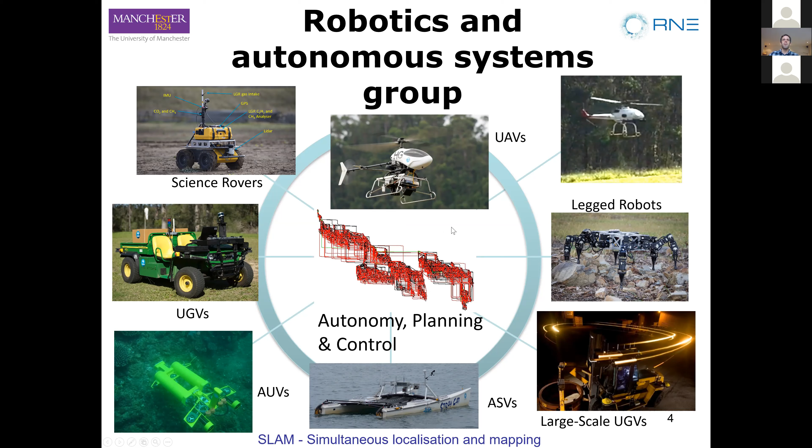Okay, so the Robotics and Autonomous Systems group at CSIRO, they're currently working on the DARPA Subterranean Challenge, and they've completed 3 rounds and they have about another 3 to go. So if you don't know a lot about the DARPA challenges, it's actually quite interesting to look it up. DARPA is the American Defense Research Agency, and they essentially can't be bothered to do their own research anymore. So they put out these challenges and let other people do their research for them. So CSIRO are doing this work on subterranean vehicles for them.

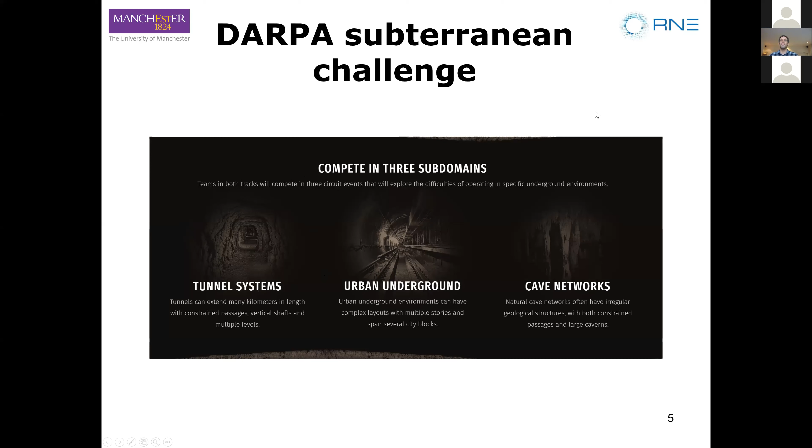Okay, so next I'm going to try this video. So this video is about the team I was working with while I was in CSIRO and the technologies that they're bringing to this challenge. And so Nick, the guy who's presenting this video, he's the leader of the DARPA team at CSIRO.

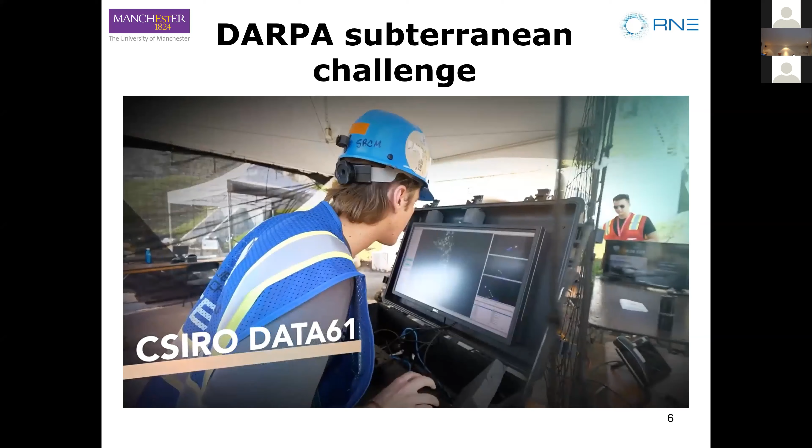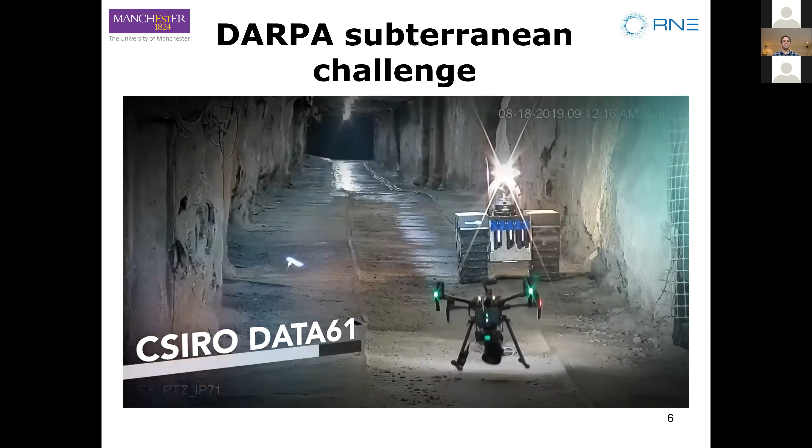We are now creating a big global map and using that for global navigation. And on top of that, we're computing 3D frontiers. So any places in that map where we don't have information, or we think there might be an opening, the robot will be attracted to it and explore these frontiers on the scale.

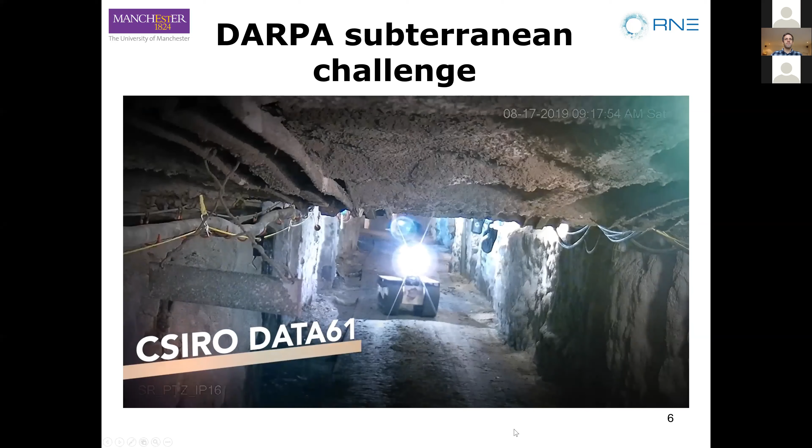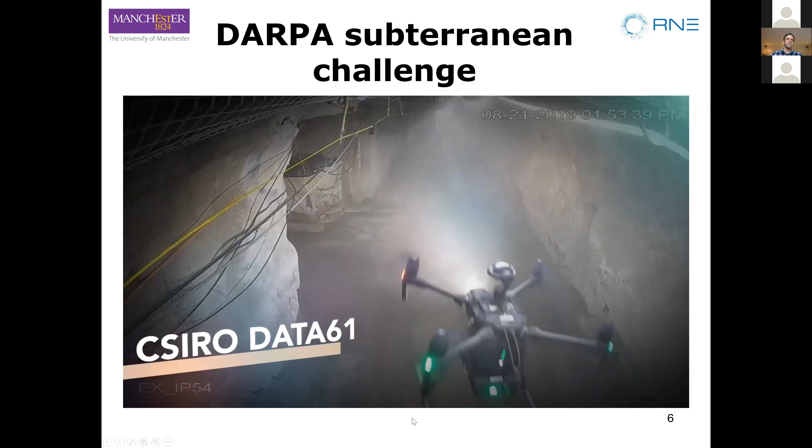We started from a really strong multi-agent localization framework with a spinning LiDAR. So we built a common perception backpack, and then around that, we really built this multi-agent exploration. So the drone's able to explore by itself, the robots with these global maps, and frontier points and constantly explore.

Okay, I'm going to cut that off there, but I hope that gives you a bit more of an insight into what goes on at that lab. So that team that was developing all that stuff is about 30 people. They had at least 10 dedicated people just writing software, and then another 10 engineers doing all mechatronic work, and then they have managers and research teams. So as you can tell, it's quite a big and well organised effort, and some of the robot systems they've got are quite impressive.

Okay, so now I'm going to move on to talking about the work that I did while I was over there in the lab. So the aim of this work was to develop the first mobile robot that can autonomously map a radiation environment and at the same time avoid areas it finds to have high radiation. So functionally, what we wanted out of this robot, we wanted to be able to put it into an unknown radiation environment. So that's an environment that's unknown in terms of where radiation sources might be, and unknown in terms of the physical environment that the robot's operating in.

So a good example of this would be a disaster environment where you want the robot to go in and autonomously explore this 3D environment and produce you both a geographical and a radiation map of that area whilst minimizing the dose that the robot receives.

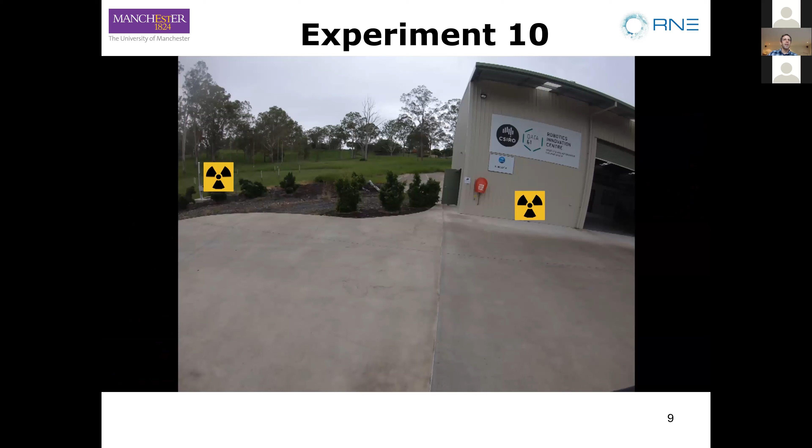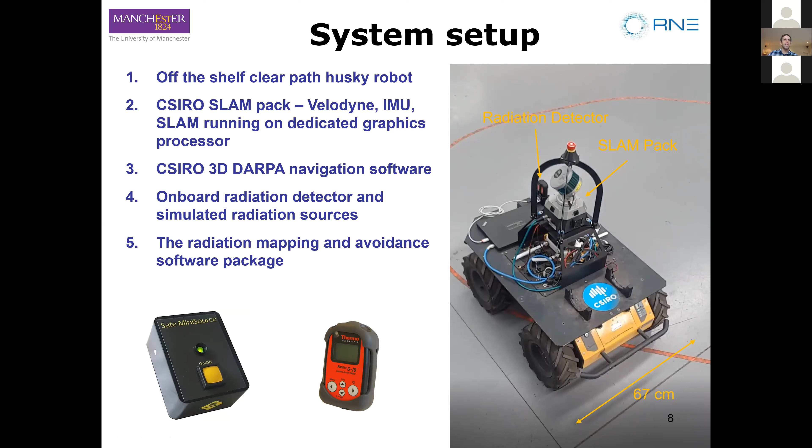What are the next steps for this project? Well, we actually have people in Manchester, so Andy is working on some similar stuff to this, so I think he will probably be picking this up and carrying on with it. But we also have people on our grant that runs alongside RAIN, working on very similar stuff. So there's quite a few people in different areas working on this sort of thing. Which sensor did you use for the methane detection on the robot in the overview slide? We didn't have any methane detection on the robot.

Can SLAM algorithms be used outside of robotics, such as on a radiological operator? Yes, I should have mentioned that; they actually have just a backpack that you can use as well, and they have another handheld version of it too. I'll just do a couple more. Is the robot autonomous or manually controlled, or both? It's autonomous in between waypoints. So I tell it go to this point, and then it autonomously navigates its way to that point, doing all of the obstacle and radiation avoidance.

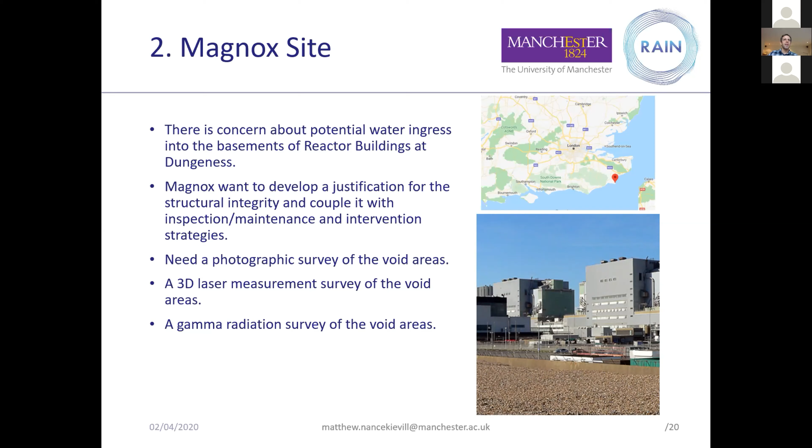So one site that we're working towards, and we were hoping to do a bit of in the next couple of months but is on hold for obvious reasons, is some work at the Magnox site in Dungeness down in Kent. There's a little bit of concern about potential water ingress into some of the basements of the reactor buildings, so we need to justify the structural integrity and couple it with general inspection and maintenance strategies. The big things needed are a photographic survey of the void areas, a 3D laser measurement survey, and a gamma radiation survey. That's relatively consistent across multiple sites. But I'm mainly going to talk about Dounreay today.

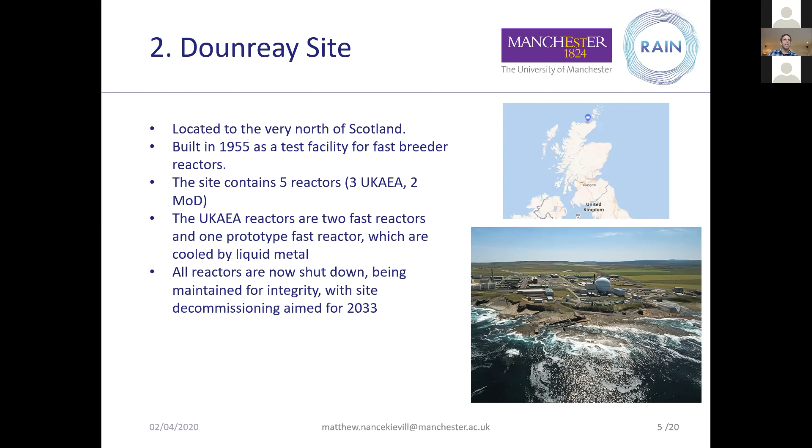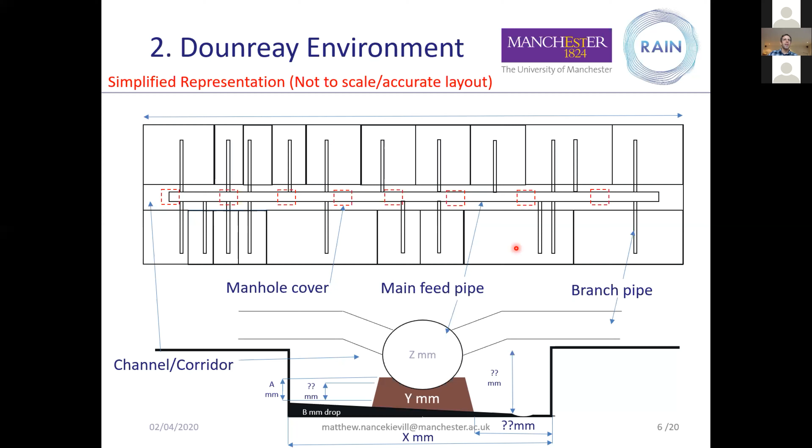So we're looking at operating a robot in this area in the corner here, and we're constrained with size and also deployment mechanisms. We need to deploy down one of these manhole covers, which are a certain size, set up containment, and operate in here. What Dounreay have asked us to look at is a visual inspection of the area: are there any blockages, debris, leaks, that sort of thing, whilst also doing a complete radiological survey. We're talking gamma, neutron, alpha, and beta, but mainly dose rate information. We're not really looking at spectroscopy right now.

Dounreay have agreed to provide all the relevant sensors for the robot. One of the really interesting things is also taking samples or swabs of areas highlighted as areas of interest by Dounreay personnel. Initially this may be 30 to 50 samples, but during our visit it may come down to less than 20; we'll see how it goes. We'll be given about a week to complete the tasks. The data has to be left on site. They're going to be handing us a hard drive that everything has to operate off of. We just get a human readable format out of all the data.

All operations are under remote control, no autonomy, and we need to have a fail safe. So if a wireless link is broken, because at the moment this is all wireless and on batteries, we need some way of retrieving the robot. Hopefully, once this is all complete, we can have some sanitized data to publicize a few weeks after deployment.

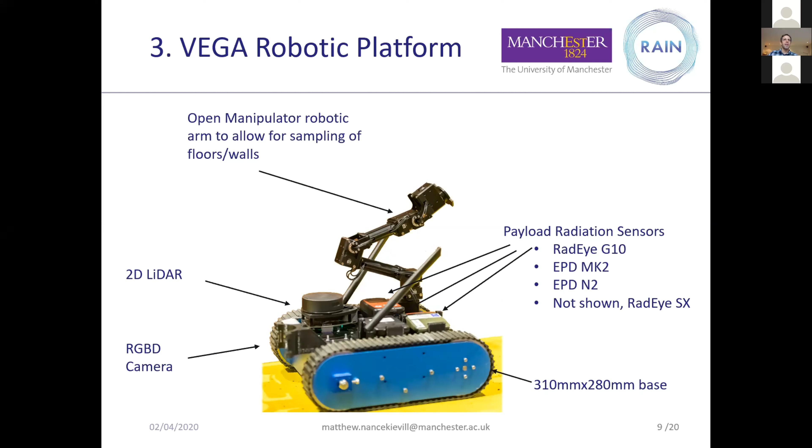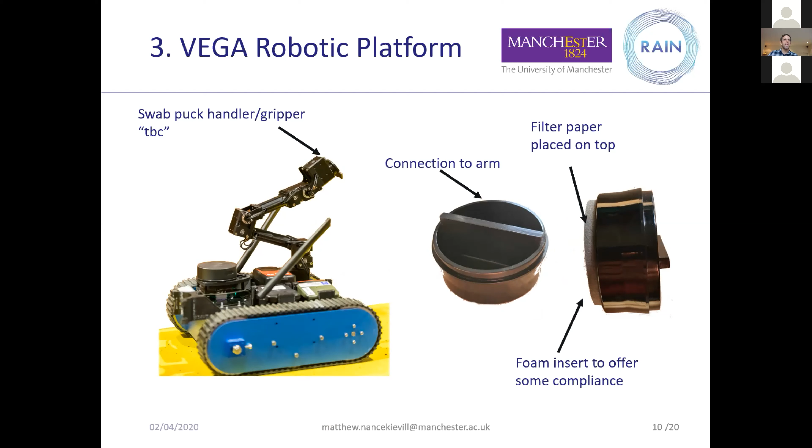We initially wanted to hold multiple bits of filter paper samples on the robot, so we could do multiple samples at one time. This looks quite difficult, especially with cross-contamination, and you can see on the top of the robot it's getting quite packed. So we're likely to pick up a swab, take it back to an entry point, get it changed by an operator, take it back out and do one swab at a time. But this is under constant review.

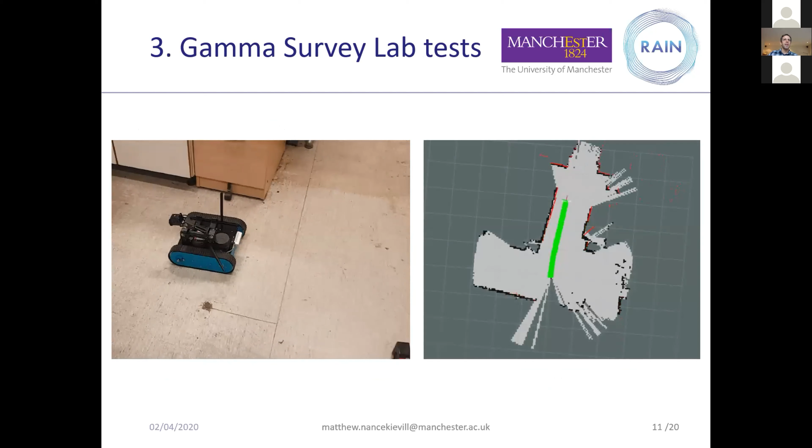So some lab tests of this. It's just a very simple set of videos of the robot moving about. The green on the right represents no radiation, and I'm using the same fake radiation source that Keir was talking about in the previous presentation. So as it gets near, things start going red because you're really, really close to radiation, and then it starts

moving away. But one of the interesting things to take away from this is the sensor only starts showing you that it's detected radiation when it's really close to the source. Now, as it's driving away, you'll see that it's saying there's radiation where there wasn't on the way up. And that's because there's about a 10-second integration time. So one of the ways around this is just driving really, really slowly. Otherwise, we need to do some sort of post-processing interpolation to work out that if it started there and finished there, it's probably somewhere in the middle, based on the time it takes to get our radiation results.

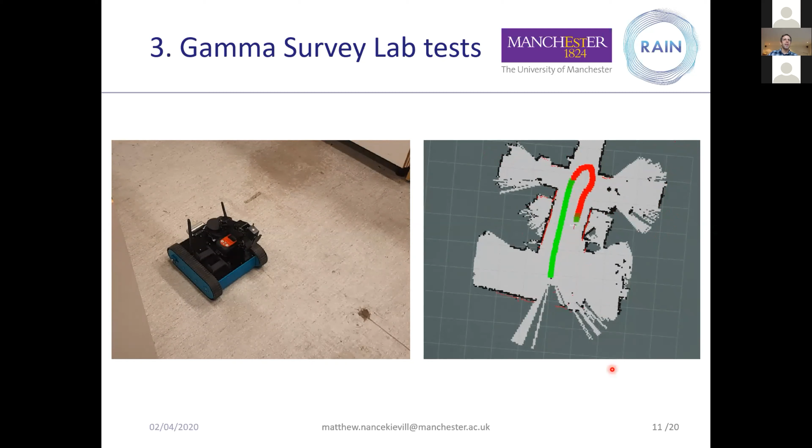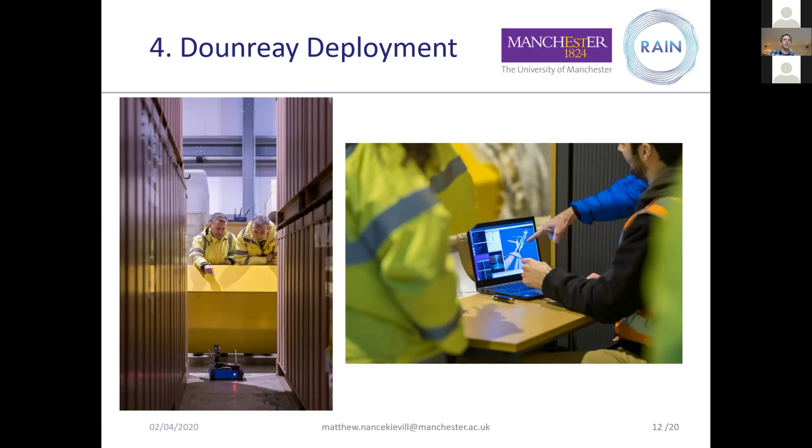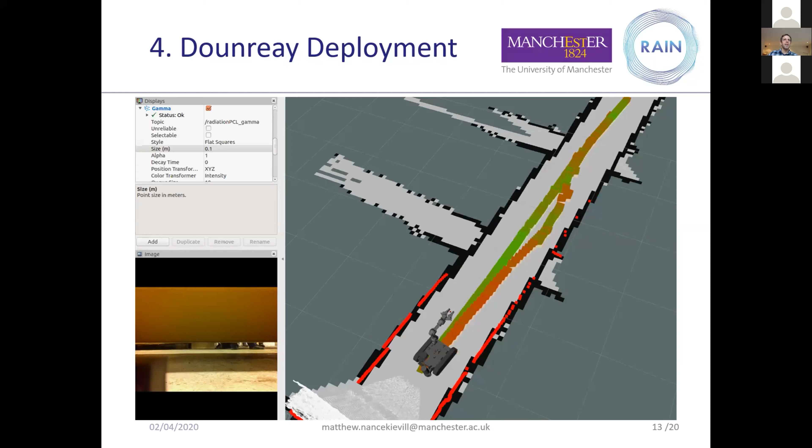Again, another big thank you to Dounreay. Here they all are on the yellow high vis. Jason Simpson, who's hiding away at the back there, and also Greg Cormack helped us a lot in communicating and getting this going. It was really nice to have this big push and to get it all done by March, and luckily we got it done before everything shut down.

So what the plans are now is we'd like to go back. It was initially designed for early June to go back for another site trial for a day or two, and then to go back a couple of weeks later for a whole week to actively deploy. As you may have guessed, this may get pushed back, but we'll see what happens.

It's also dependent on Dounreay personnel completing a preliminary inspection, so they're going to lift one of the manhole covers and have a little look, see if there's an easy place to deploy the robot. It may be that we have to deploy somewhere else, and because it takes a minimum of about a week to set up containment around each of these manholes, it may require a bit of moving around and checking.

Kind of classic industrial requirements, so safety cases, risk assessments, and further development of the robot. We're getting a lot of help from Dounreay and I2C for safety cases and risk assessments and project management of this on an industrial specification. And some of the further development of the robot that me and the rest of the group are doing are arm control for swabbing, developing software for the proprietary EPDs, which are unfortunately discontinued. So basically, we need to work out a way of integrating these EPDs with the robot.

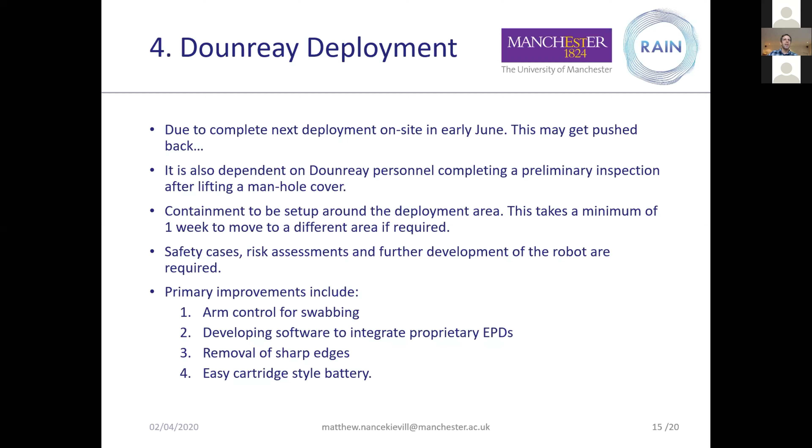So I'm now going to move on to a summary of some of the aquatic robotics research. This is something I've done a lot of in the last few years. A lot of you have heard of the AVEXIS, which is a small submersible designed to get through 6-inch access ports, moves in about 3 degrees of freedom. And it could take a payload of just over 1 kilo with no additional ballast.

We did some tests in Fukushima with a sonar on the bottom that weighed about 1 kilo. You get a live HD camera, and right now it's acting as a research platform to integrate sensors and control algorithms. So we had a PhD student working on interesting control, and we do a lot of work with Lancaster University on radiation detectors and integrating them in the system.

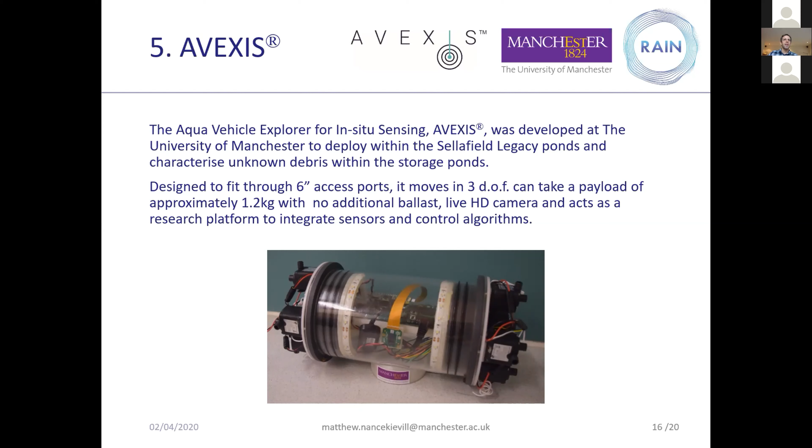We'll see how these videos work. They'll probably be a bit choppy, but an example of this was a test done in a TRIGA reactor in Slovenia. This was it driving around before we turned it on. As soon as we turned it on, we had to hold it still in case it became irradiated, failed, and floated to the surface. But it's designed to work in these cluttered environments, and we'd integrated here a sensor from Lancaster University to do some spectroscopic analysis of the radiation sources coming off of the reactor.

So this was also to do radiation tolerance testing. It lasted for about 80 gray, 80 sieverts, where the power supply went. A lot of the other components would last a bit longer, but if the power supply goes, then you can't operate. So it's something to work on.

But yeah, we're hoping to do some more tests with Lancaster in the future, but it's all been put on hold because of shutdown. Another bit of work that we're doing is using that AVEXIS underwater. We need an accurate way of positioning it. Not the easiest thing, and it's often done with acoustics, which are accurate to maybe about 1 foot if you're lucky. So we're developing a vision-based system with a camera near the surface of the water that will visually track a marker that is on the ROV.

So using the MallARD system that was originally developed by Keir, who spoke before, we're going to have that float on the surface, and it knows its position to an accuracy of about ±2 millimeters, and then extrapolate some XY coordinates of the AVEXIS underneath it. And then obviously we have the depth on board of the AVEXIS to get Z. And all sorts of gymnastics of positioning to work out roughly where it is, hopefully to a higher accuracy to within a couple of centimeters in comparison to acoustic technology.

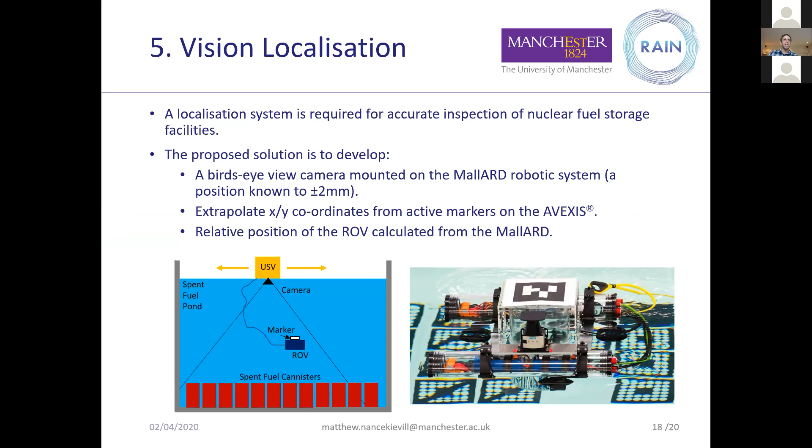One of the difficulties is verifying that this system works. So we've purchased a Qualisys system, which for those of you that know the Vicon system or motion capture systems for movies, is an underwater tracking system that is kind of millimeter accuracy. It's due to be installed the day after shutdown, so it hasn't been installed. But we're going to use this to verify our localization system and also some kind of underwater automation potentially. It's part of a growing facility, and I believe that if anybody's interested in collaborating and using this bit of kit, that we can have a chat. Yeah, it's a great bit of kit.

So just finally, collaborations. We've set up a bunch of robotic platforms. So here we've got the Vega robotic platform, the AVEXIS, the MallARDs, we've got a Blue ROV, and we really like integrating technologies, payloads, and all sorts of different things. We can offer demonstrations and deployments on site or in a lab at relatively short notice, lockdown willing. So yeah, basically, please get in touch if anybody's interested in using any of these robotic platforms for issues on site, or if you can see potential for integrating a new novel payload or sensor.

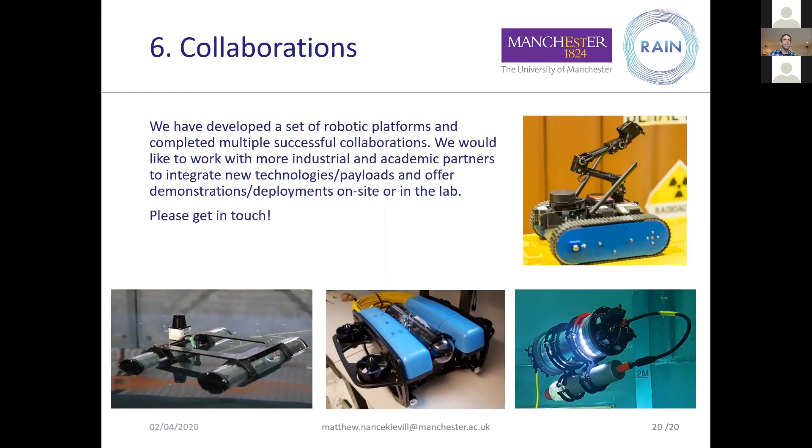Thanks, Matthew. We're a bit tight for time, but we've already got a question in. Does the robot gradually become radioactive, and does that affect how you can use the robot and how much work it can do? So it depends on the environment that you're in. So gamma radiation won't make the robot radioactive. Over time, it will degrade to stop the electronics working, but it's over a much slower time than humans.

If you're operating in a neutron environment, depending on the flux, it can affect what you're doing, and it can make the robot radioactive. So I put it in a neutron flux, and it made the communications a bit, for want of a more scientific word, iffy. And then over time it became active, and what became active in it was the gold in the components. So then it had to be left for a couple of weeks before it could be used again. But hopefully in most of the radiation environments we're going in, it shouldn't affect the operation of the robot.

Great. We've got a question about battery life. It's for the Vega. So battery life for the Vega, without the arm, it was about 4 hours. We've not done a lot of testing with the arm because the arm is always on, so it's always drawing a bit of current. But we're assuming somewhere between 2 and 4 hours.

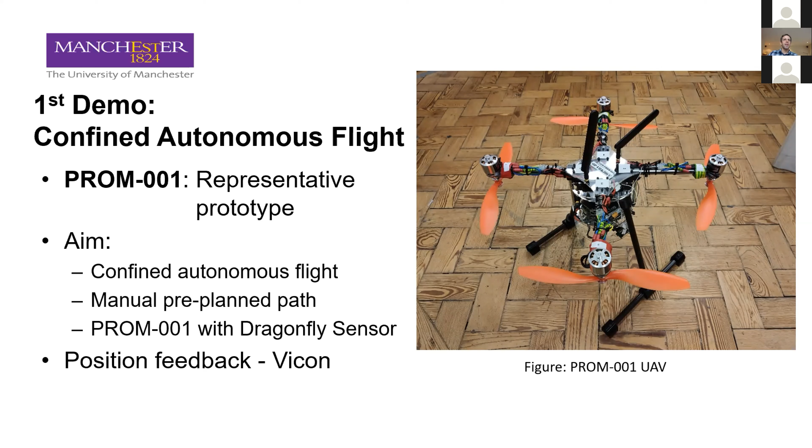So the aim of this test was to do a confined autonomous flight. And this is a basement at the University of Manchester. It's fairly low ceiling height, fairly tight, and you can see there's a Vicon setup in there, which I'll talk about in a minute.

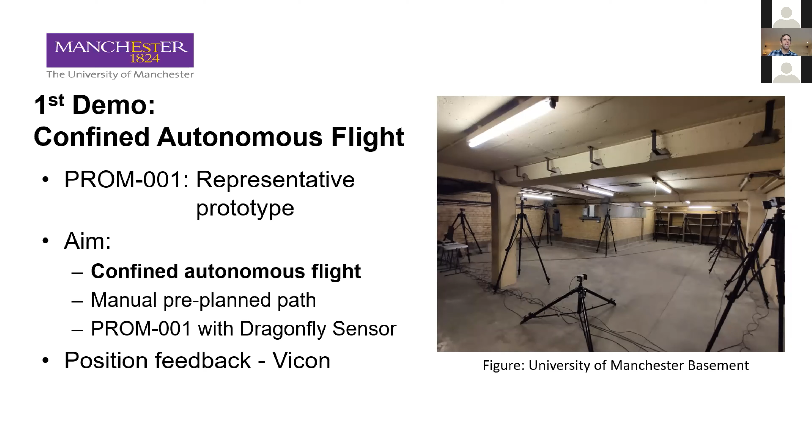So we scanned this basement with some LiDAR sensors, and then manually generated a path that we wanted the drone to fly. So we knew it was a safe path. We knew it wouldn't deviate into walls and that sort of thing. So we're going to fly the Prometheus drone with this Dragonfly sensor pod.

So the Dragonfly sensor pod was developed by one of the partners on the project, Headlight AI, and it actually produces sort of a 3D donut of depth information. You'll see a bit of a stream from it later to help explain. And then we're using the Vicon system as position feedback for the drone. So obviously we couldn't put a Vicon system down one of these mines that we're looking at. So down the line, we are going to look to develop SLAM or positional feedback using the onboard sensors.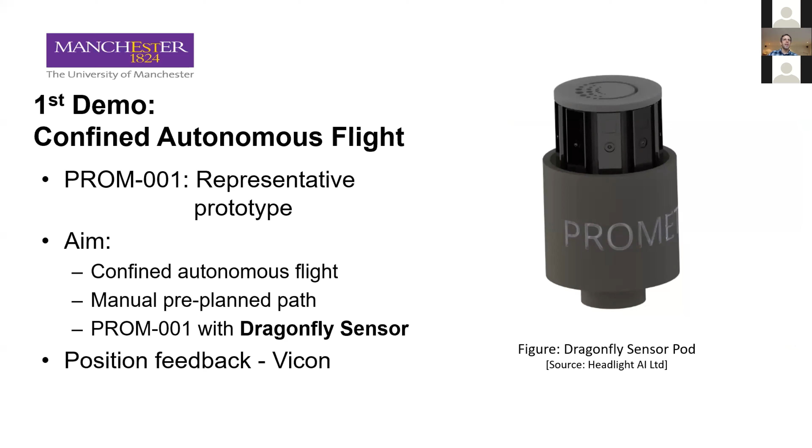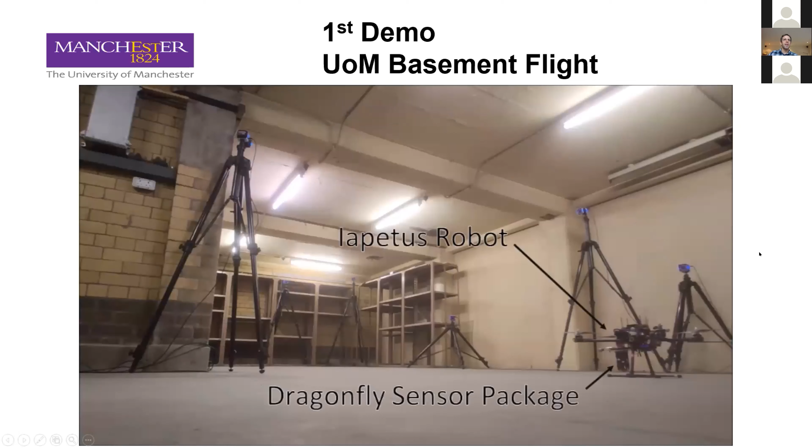So this is the first demo, or a video of the first demo. So this was the pre-scanned environment that I was talking about, the basement. You should be able to notice in the corner when it pans up the sort of racking that was at the back of the room. So some of the more eagle-eyed of you may have noticed that the UAV that we're using is different to the Prometheus one. Again, it's a similar size and weight, but we had some issues with the first prototype.

So that was a manual takeoff using the position feedback, and then we switch it into autonomous mode to fly the trajectory that we manually inputted. So the deviation in height there is actually just from the ground effect and ceiling effect that's going on to the robot, and the fact that because we're using a different platform than intended, it wasn't as well tuned to the payload that we put on it. So hopefully that will be reduced down the line. So it fairly successfully followed that path that we inputted into it.

So this is the data from the Dragonfly sensor. So this is just the raw data from each sensor in the pod. You can see some of the racking at the back that it's picked up, and the shadows of the tripod cameras on the walls. So yeah, that was the first demo.

So the second demo was this full autonomous mission. So the difference with the previous one, we were looking at trying to fly a path that was generated from our path planner, as opposed to a manual one that we knew was safe. So what we did was we modeled the environment that we were going to fly in. In this case, it was the Bristol Robotics Lab with the University of Bristol, and we built this simulation environment that's shown in the picture. It was a sort of 8 meter by 4 meter area, and then we put a 1 meter wide, 1 meter object in the middle of it.

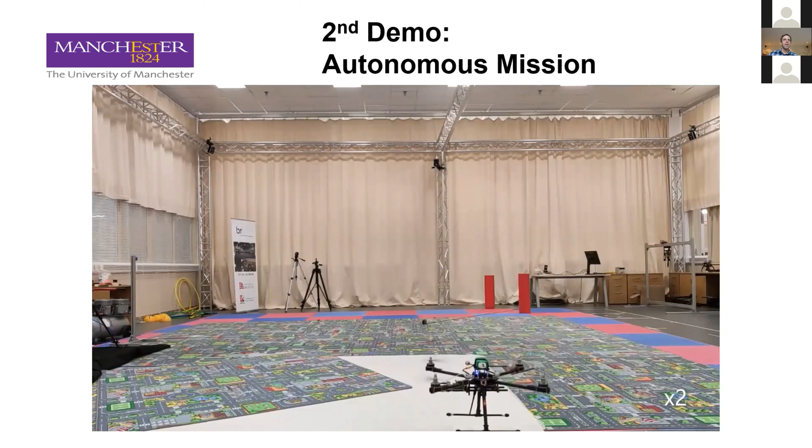So we're aiming for a flight time for the system of between 10 and 15 minutes, which is dictated by the final weight of the system, which isn't completely determined, as we're still constructing the drone and we're unsure exactly how heavy everything's going to be. So when it's folded up, it is around 130 millimeters in diameter. That's to allow it to fit down one of these 150 millimeter boreholes, but give us a bit of wiggle room to allow for the deviation in the borehole.

So when they drill these boreholes, they're a real thing. The drills skip side to side, and there can be jolts of rock and stuff, and they can twist and turn a little bit as you go down. So that's why we've added that clearance in there. As it unfolds, it actually gets a little bit smaller. So the total length from top to bottom goes from around 0.5 meter to around 420 millimeters. And then its unfolded tip to tip diameter is around 3/4 of a meter.

So as well as all the folding hardware and the things required for flight, it has all the onboard computing and sensing required for keeping itself in the air, as well as mapping this void. So I'm just going to move on to the future work of the project. As I mentioned before, we need to start to develop that SLAM system. So how we can use the onboard sensors, the Dragonfly sensor pod, to give us an idea of our location and stop us flying into anything that we shouldn't.

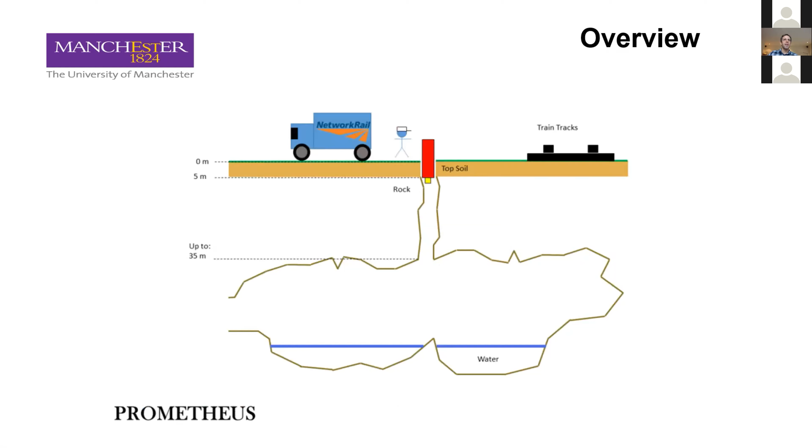Yes, we've basically been told you're not going to get it back. The size of the drone changes so dramatically when it's unfolded that even if you could manage to find it wherever it had crashed, which is again very unlikely, it'd be really difficult to get it back out of these boreholes without completely destroying it. So yeah, we're working on the theory of, if it crashes, it's staying down there. There's more questions coming in.

Cheers. Another question here. Has a survey been carried out of a typical mine to understand any potential for strong turbulent airflows or magnetic effects that might affect an off-the-shelf flight controller? That's a really good question, actually, because it's incredibly difficult to work out the effects of flying in ground effect or walling effect or ceiling effect. There haven't been many studies carried out to actually dictate what that is. And if you're in a very confined mine, you may actually be flying in all 3 of those things all at the same time.